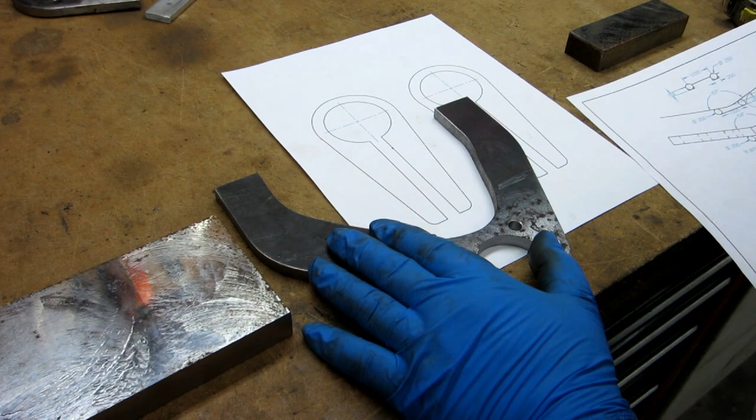All right, I'm still working on the upper control arms. Now what I've decided is that I need a 154 degree bend here. The gussets are actually going to get bent at 157, so I'm thinking anything right in that ballpark there.

I may be able to just make one bending die and do them the same. So if that shows up well enough in the image, we'll see. But basically, I got on CAD, and this art is...

generated from the 3D program. I just took an image of the right side, looked at it, and played around with it. If I put a space, I need to keep it fairly tight because the gussets are going to be coming right in here somewhere. So I need the bending die to be fairly narrow underneath here.

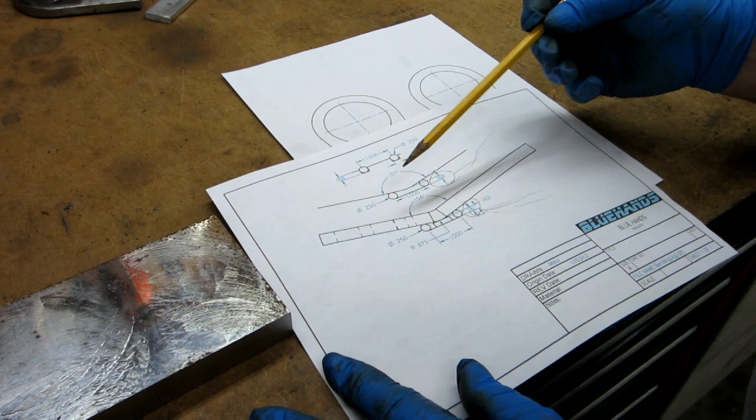So what I'm doing is, I thought a 1/4-inch steel dowel would be stout enough. I wanted a rounded edge so I don't create a bunch of scarring. So then I put them 1 inch apart. Okay, and this is all in CAD, so I was able to measure the radius that should be on here.

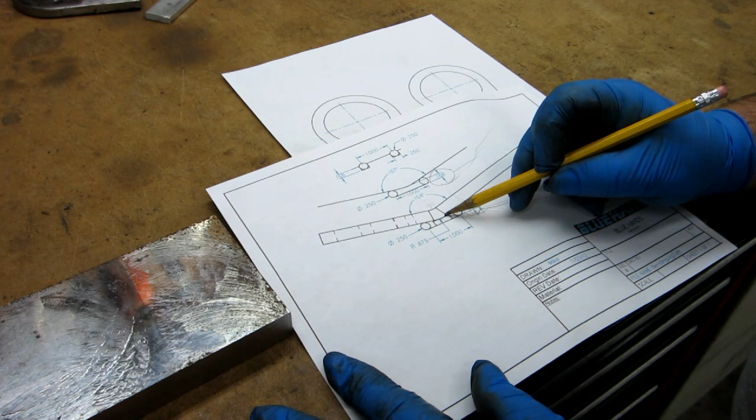This inner radius here is a 1/2 inch, and according to the CAD program, that put the outer radius at about 0.875. So based on that, from the top of the dowel to the top of that plate, the amount of deflection would be 0.161.

For the other angle I need, 157, it works out to 0.168. So what I think I'm going to do is, instead of messing around with cutting 2 slots, I could actually just do that.

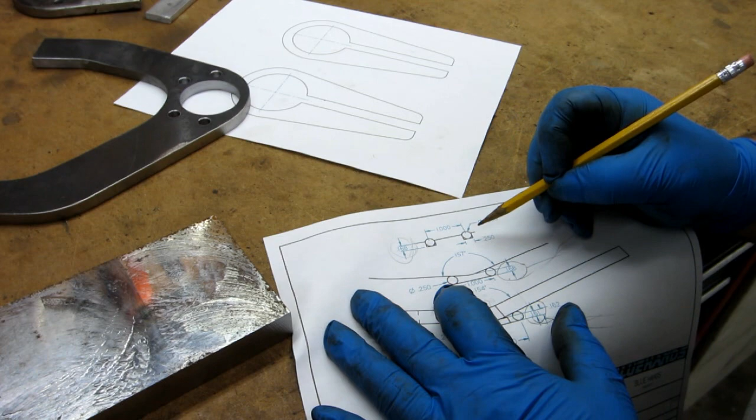I could just cut it if I have 1/4-inch dowel, I've got to go check. I could just cut the 2 slots 168 deep, and that would give me... yeah, I think that, anyway, I've got to go double check that math.

But no, that's right. Yeah, that'll work. Okay, so if I cut 2 1/4-inch slots and drop a dowel in there, that means I can just put my bend in there. I may just try that. That ought to be quick and easy. I need to find some 1/4-inch dowel first.

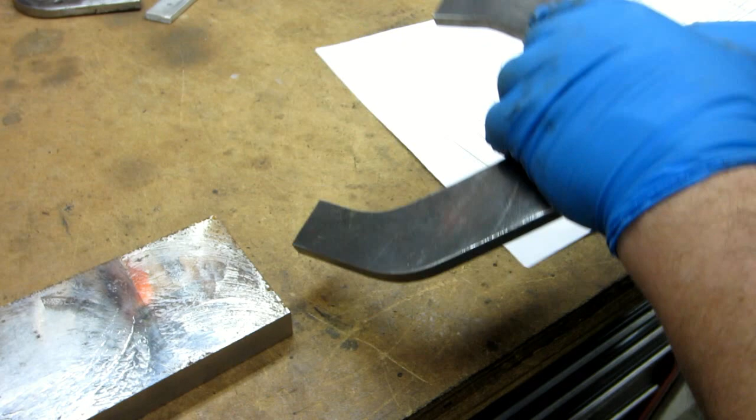So what I'm doing here is, I know that these gussets are 1-to-1, so that's where they're going to weld on, and I needed to see about where they're at. Now they're going to be bent slightly, so they're going to be a little shorter probably, but right there at the very least.

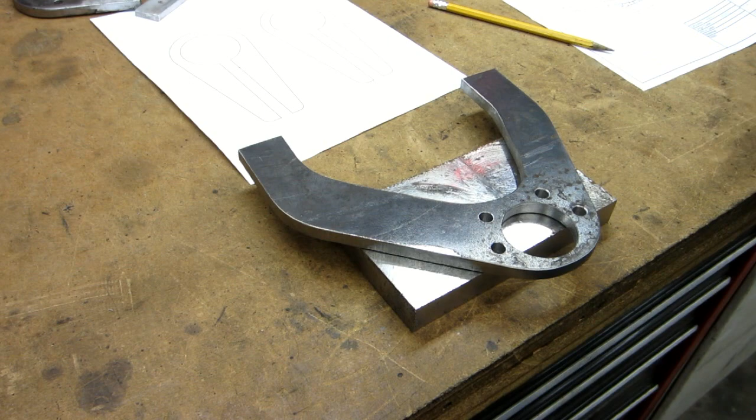So what I'm doing is I'm looking here and going, okay, well going straight across this block is plenty big enough. It takes me all the way to the edge here for support, and all the way to the edge here, so it should be big enough. Because the reality is that's where they end. I'm going to put the bend down here somewhere a little closer, so that makes it even a little narrower. So let's go look for some dowel.

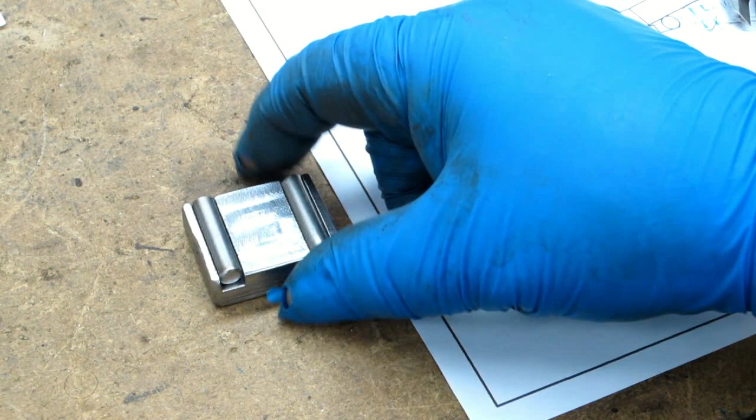Hopefully I don't break off the edges there. This is just purely a test. I wanted to see how much slop was in there by just using a 1/4-inch cutter and 1/4-inch dowel. I might have to go with like a 3/16 and actually machine the width to 1/4-inch, because a 1/4-inch cutter will cut slightly wider than 1/4-inch.

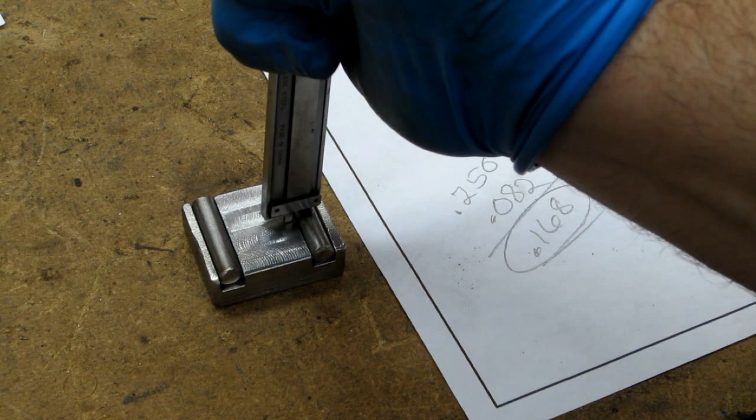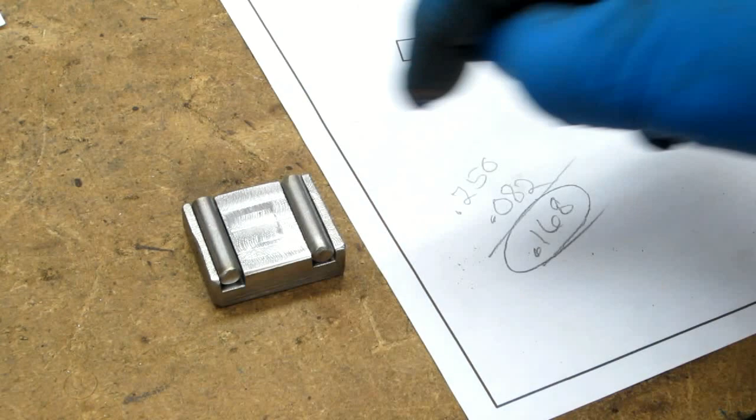Anyway, I took the calipers and did a depth measurement. Came up with 0.082 from the top down to the recess there, and that from 1/4-inch is 0.168, which is the dimension I had for how deep I wanted to put those. So now the thing is, put it in the shop press and push a piece of 3/8 inch steel down into there and see what happens.

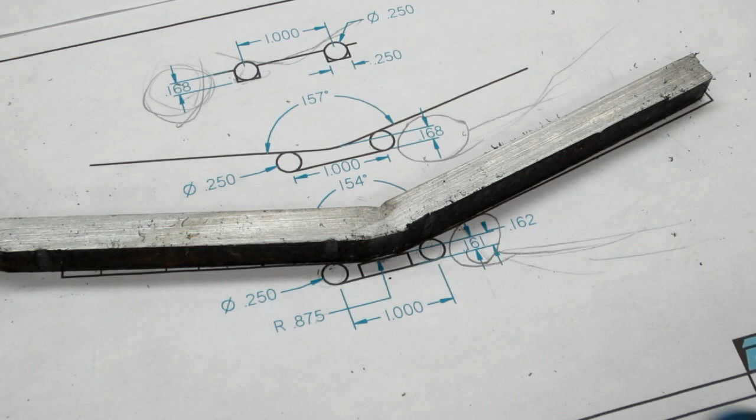Well, for the first test, I'm pretty pleased with that. It's really close. Basically, what I can do is use the same dimensions, but not cut quite as deep. Then I can come back in and machine this center down after testing, and then walk that angle right down in there.

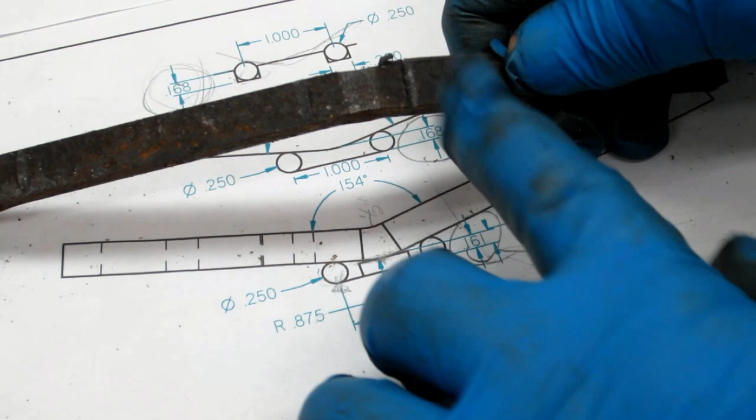Right now it's a little extra deep. Now it could be because, you can see, I flattened that out because I just pushed way too hard. I also got dimples in here from the dowels, so I'll have to play with that some more.

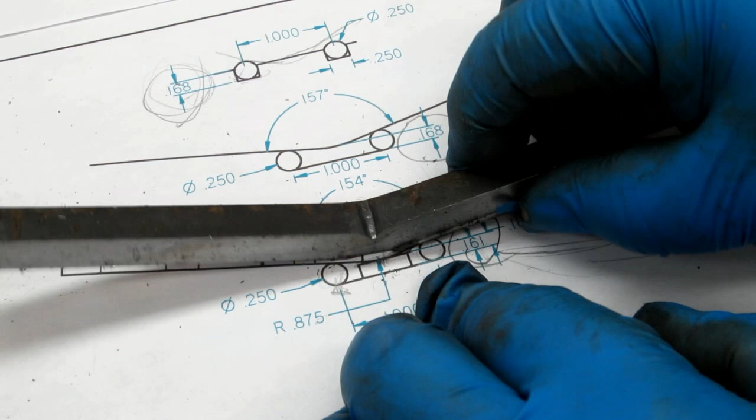And I got a major dimple right here from using the right angle die, the push piece. So what I want to do is make a 1/2 inch round die. So before I start adjusting dimensions and stuff, I'll use a half-inch round piece to push down in there, make that a little more subtle, and see what the bend comes out like.

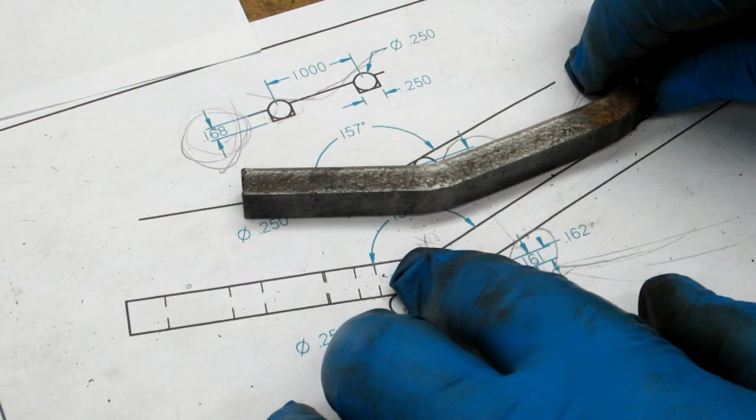All right, it's just a hair tighter than the 157, and this is with a piece of basically half-inch titanium in there. You can see I still pushed it a little too hard, but got dimples underneath, not quite as pronounced though. Angle-wise, yeah, we're really close in the ballpark there.

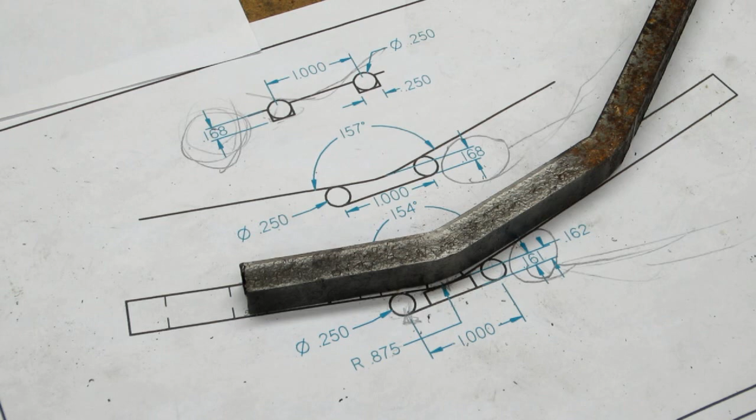Basically, I think I've proven it enough to want to move forward with making the bending die. I'll think about it just a hair more. I might possibly want to machine an angle into this piece instead of using the dowels because of the dimpling. We'll see. If that's the case, I might use something else.

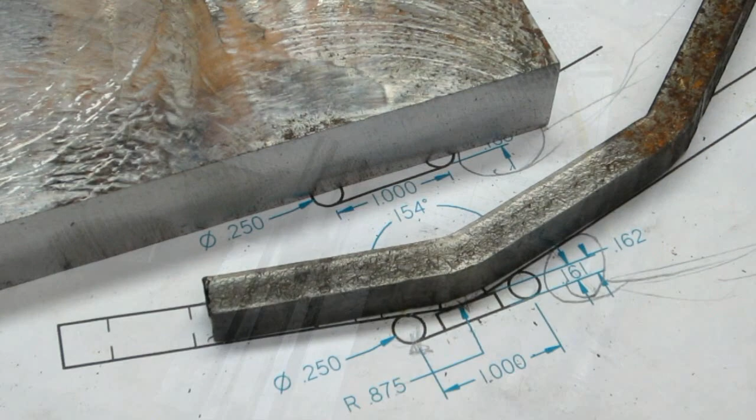Yeah, we'll see. I'm still playing around with the bending. I did several yesterday, played around with a couple of things, putting a piece of sheet metal between the pins and that stuff so I didn't get the dimples there from the rods. I'm still getting a big mark on the top here.

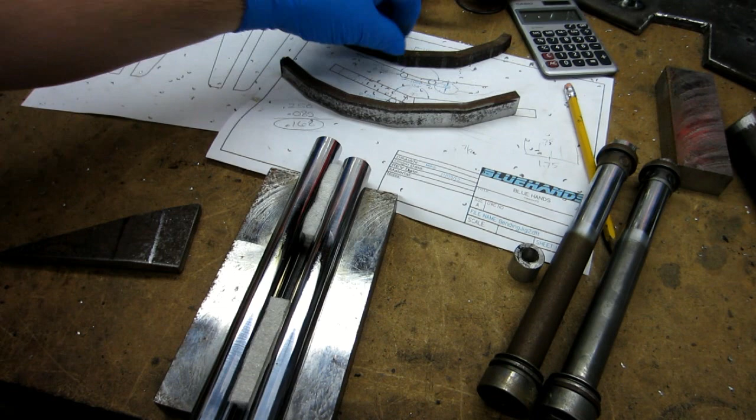But I bent those into various angles, stuff like that. Some were close and that stuff, but I needed something bigger. So this is wide enough to put the bend right there and have it fully supported.

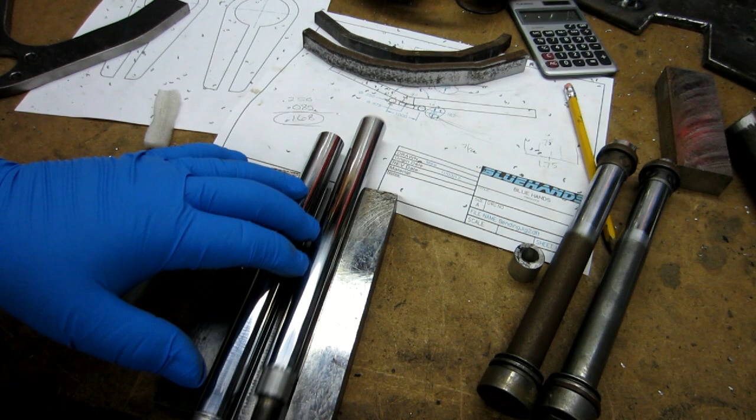Now the thing is, all this is just one channel in here. These two rods, if you look at the ends here, basically these are cut off of here. Okay, that is the strut rod. This happens to be out of a 210 strut.

So the foam in here was basically just to keep the rods separated, that way they wouldn't roll under when I was trying to put the plate down on top.

So I did put the plate down on top, and I did get it to bend. It's a 20-ton press, and it was doing everything it possibly could. So it left a couple of marks on the bottom side here from the rods, and if I remember right, yeah, if you can see that, there's a little harder to see on this one. You might be able to see it on that one.

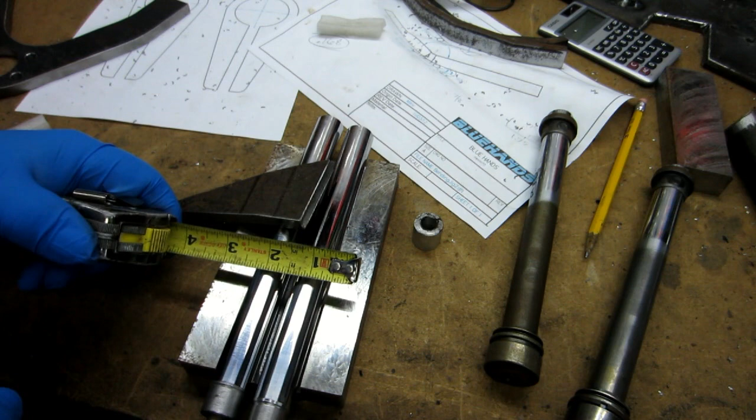Anyway, so by turning it over here, what I'm looking at is, I was just looking up a bunch of information online, and in order to do the bend I need, basically the bend points, the V should be 3 inches across. I don't think I'm going to try to make it 3 inches across, but I'm definitely going to widen this track up a bit.

Because those points aren't even at 1 inch right now. So I'm going to whittle out at least another 1/4 inch per side to spread these bars apart, and then try it again and see if it'll bend a little better.

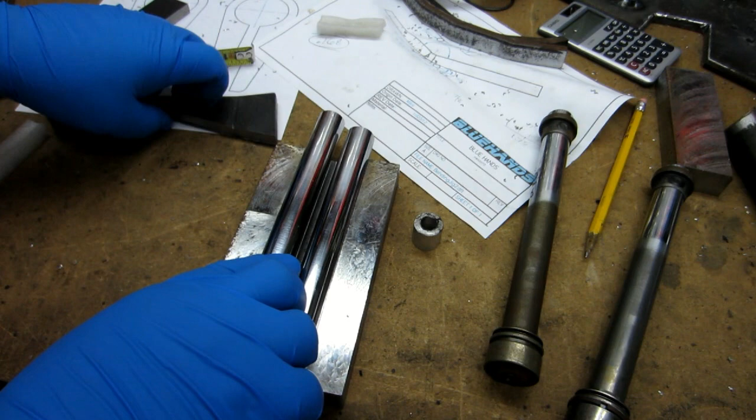Because if it took that much pressure to bend this, the farther apart the points are, the easier it will be to bend. And you can see that I've got at least twice that much metal to bend. So I may have to take a 1/2 inch out per side. We'll see.

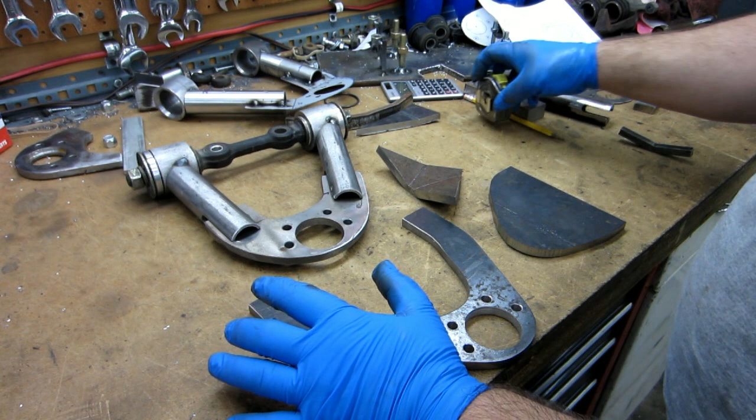Just about done messing with the bending for now, I think. So basically what I did was I modified that other plate, and they're still not far enough apart.

I bent this piece, okay, and you can see it's still leaving some big marks there. I don't remember which, I think maybe the second bend. That bend there, that one came out just about right.

Kind of hard to tell since the way I bent it in there with this piece on there too, but the other one's a little bit shallow. Anyway, that's 3/8 thick, and that was hitting pretty close to the limit.

I put it in another one I had that had everything spaced 2 inches, the peaks, my normal V-bending block, and it started to bend it, but just barely.

Now this is roughly 4 inches, okay, and where I came to that was I've got just under 1.5 inches here, and another just over 2 inches here. So between them I had 3.5, under 4 inches. This is a little under 4 inches here.

So I wanted to see if there was a chance that I could bend all of that at one time. It might bend easier since it's two smaller pieces, but then it means that my block that I push down with has to be strong enough all the way out to the edges here.

So what I may end up doing, and I'll do it later, I want to get back to testing the arm, make sure this design actually works before I bend it all up.

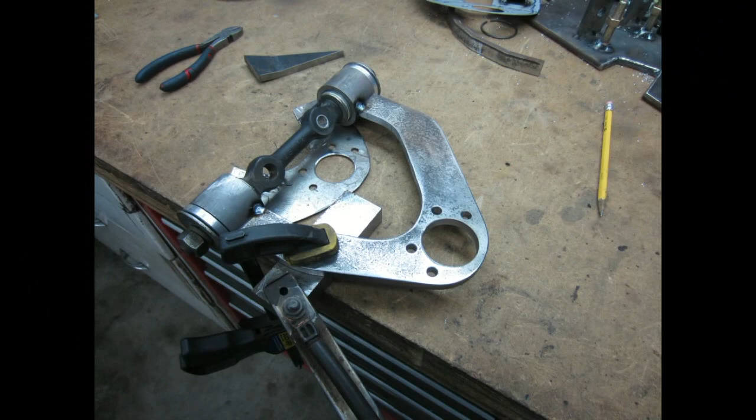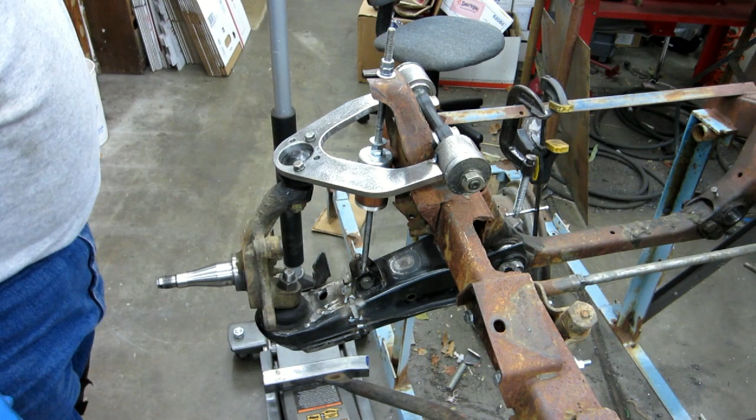Okay, I got the flat plate one mounted up. This is the lowered side. Haven't measured yet to see where the caster and camber and all that stuff is. I can already tell the caster's plenty, looking at the offset of the ball joints there.

I'm all the way down at the bottom of the shock travel. I don't have any bump stops here to reference to, so that's a figure out later kind of thing. So I got tons of clearance in here now that I didn't have before. And if I run it through the range of motion, I'm hitting the shock absorber there.

Yeah, see, I got a little... so that should be the ball. Oh, let's see, is it the ball joint? No, it's the frame hitting.

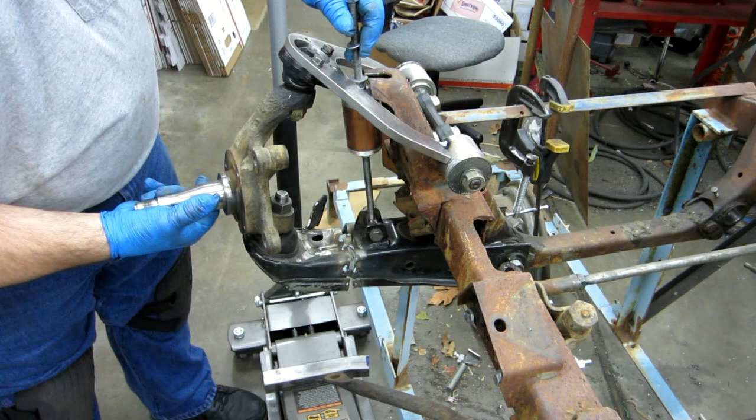Okay, so I still have not run out of ball joint range of motion. And if I go down this way, you can see I don't run out of it there either. And that must be ball joint. Yeah, that's the ball joint binding there. But provided I've got my shock dimensions set up correctly, that should be good to go.

So I'll take a couple measurements on caster and camber and see what they come out to.